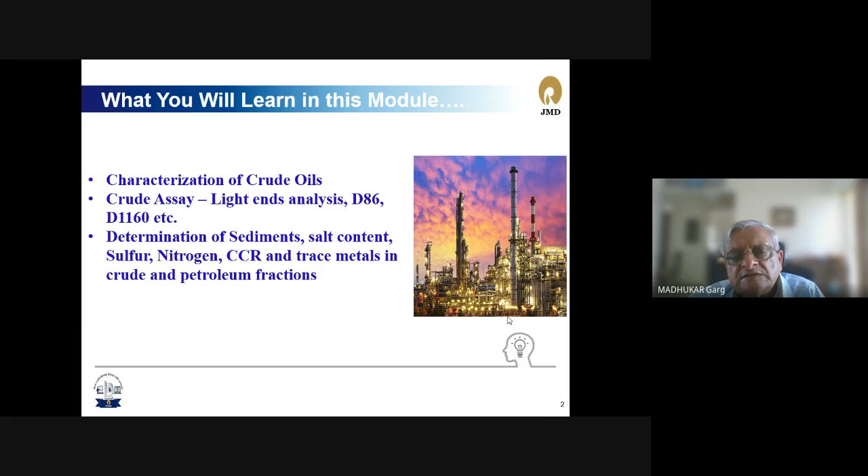Why is this important? It's because crude oil is a very complex mixture. There has not been a single individual, organization, laboratory, or even an analytical technique invented so far which can identify each and every molecule in a crude oil.

People have fantasized that crude oil would have something like 1,000 components or 2,000 components and stuff like that. But believe me, I've been in this industry for 46 years now, and I have never seen a full component-wise analysis of crude oil.

So what do we do? Since we don't have the capability to analyze crude oil in its complete detail, we need to develop methodologies and procedures to understand, characterize, and classify crude oils, so that if somebody talks about a particular crude oil, we know exactly what kind of crude oil it is, and whether we'll be able to process that crude oil in our refinery.

As you go along, on this graph the y-axis is the percentage, the x-axis is the boiling temperature in degrees Celsius. As you dig deep into the barrel of the crude oil, you will find that generally the normal and isoparaffins concentration goes down, and the naphthenes are very high to begin with, then they also go down.

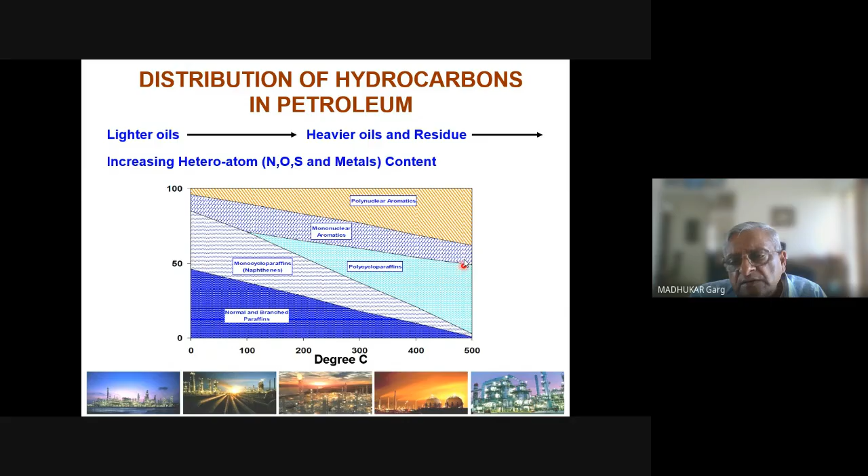The same thing is more easily seen from a chemistry point of view in this graph, where I have plotted carbon number on the y-axis versus boiling point. It's roughly matching with that table that I showed you earlier of various hydrocarbon fractions that you actually distill from crude oil.

So here they are shown like naphtha, and then kerosene range hydrocarbons, which we call middle distillates, which include kerosene or jet fuel and diesel as well. And you're going right up to something like 365 degrees Celsius here. On top is degrees Fahrenheit, the bottom numbers are in degrees Celsius.

Then you get into the vacuum distillation column where you actually distill these hydrocarbons under vacuum. So we call it light vacuum gas oil and heavy vacuum gas oil. These are changing in terms of the boiling point, and then of course something which cannot even boil under high vacuum.

We are talking about vacuum of the order of absolute pressure of 10 millimeter mercury, and that is about 545 degrees, 50 degrees centigrade.

If you look at the various hydrocarbons present in naphtha, you have basically paraffins. This is the normal paraffin graph: hexane, then decane, then C14 paraffin, etc.

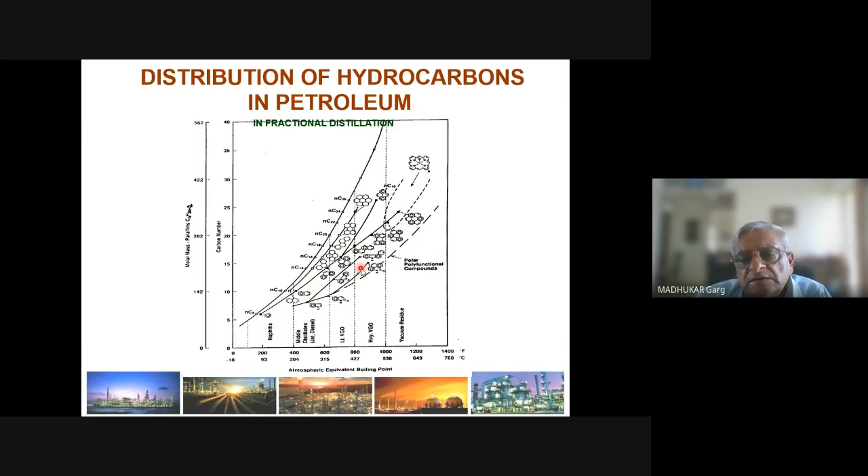But there is no way at all to identify each and every molecule in terms of percentage. So we have to understand and evolve a method of how you classify, given that you cannot determine these hydrocarbons analytically. So how do we represent the crude oil? This brings us to the discussion of crude oil classification.

Overall, there are four ways by which we understand crude oil in our industry. Essentially, the most important is where does it come from. So if somebody tells me this is a crude from Saudi Arabia, I know the typical value, the typical data on such crudes.

So the refiner has a very good idea whether it's coming from Dubai or wherever. Now there are two crudes used as a benchmark today: one is called Brent crude, and the other is WTI, West Texas Intermediate. WTI is used as a standard or benchmark in the US, while Brent is used as a standard or benchmark in Europe.

West Texas Intermediate is actually a kind of intermediate crude—I'll talk to you about what an intermediate crude is. But Brent is what is dug out from the North Sea, deep sea mining just north of Norway. It's somewhere between UK and Norway, that entire ocean area which is called North Sea.

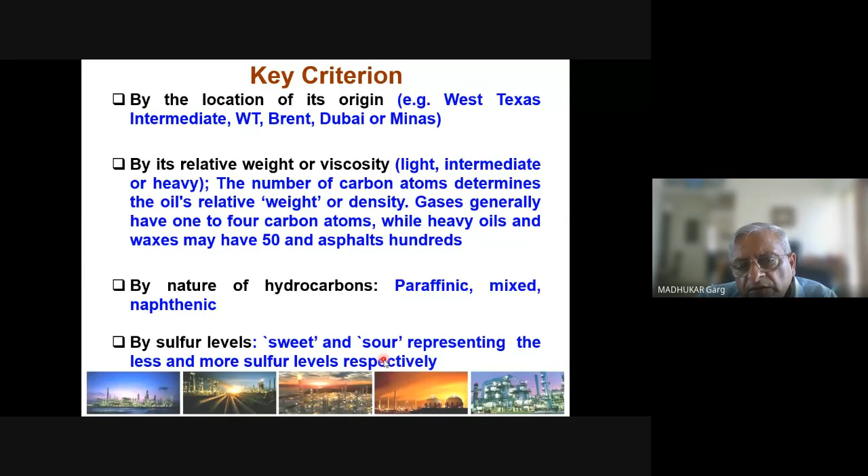Somehow these terms have gotten stuck in the industry. So crude oil could be, let's say, from Dubai, a Dubai blend. It could be naphthenic crude, intermediate crude, and sour, and you can have various combinations. So basically the source, whether it's light or heavy, what kind of hydrocarbons are predominantly present, and whether it has low sulfur level.

Now coming to the actual definition of the crude in terms of light or heaviness, it's common sense to link it up with the density of the crude. The density of the crude is used for weight to volume or vice versa calculations. So density is very important, and generally it's measured at 60 degrees Fahrenheit or 15.5 degrees Centigrade.

You'll find that this industry is extremely dominated by FPS units, by American units, because a large amount of development, technology, know-how and science originated here, and the US actually leads in this particular industry. You'll see other terminologies we use actually originated from the US. Density is also used to check the consistency of the crude supply.

So basically, if you are getting crude from the same source, let's say from Saudi Arabia, and it is termed as light Arabian crude, then when you measure the density of that crude oil, that itself will tell you whether it is the same crude oil that we received last time or if there is any variation. It is also a very important property used in a large number of correlations, and we'll talk about that in greater detail in the next class.

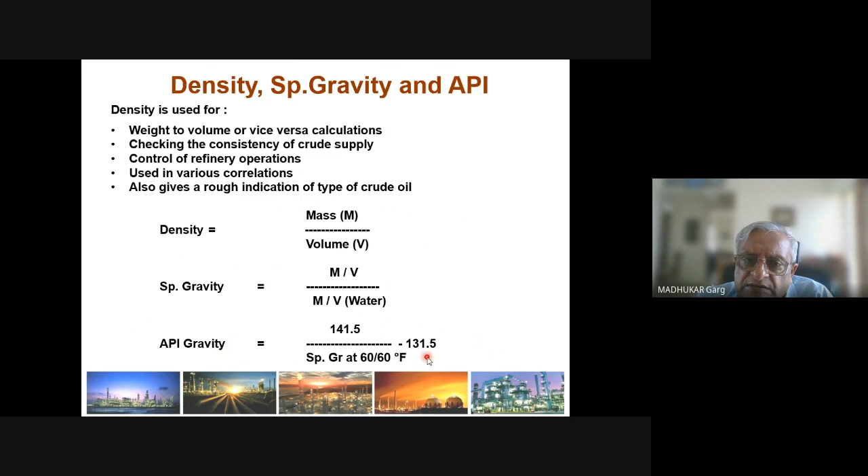Please remember this - API is a major factor for crude pricing. Even after two years in this industry, you become very conversant with it. The only way you can understand a crude oil is basically by somebody telling you what is its API gravity - it's called degree API, written the way you write degree Celsius with a small zero at the top. So the intermediate crudes, like WTI which I mentioned, that API would be somewhere between 20 and 30. This is a very important classification by which we try to understand crudes.

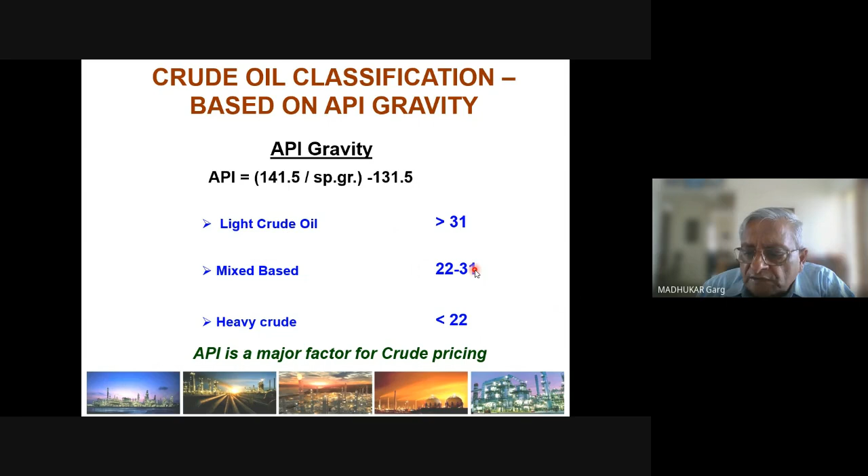It might look innocuous, might look very simple, and to some of you it might even look stupid, but API gravity is extremely important for us to know about any particular crude oil. And if you look at the sulfur part, whether it's sweet or sour, that again depends upon whether the crude is light, medium, or heavy. So for crudes in the range of 35 to 60 API, depending upon whether the crude is sweet or sour, the sulfur levels could vary between 0 to 0.5 or greater than 0.5.

So you can see one thing very clearly here: even the definition of sweet or sour crude really depends upon whether the crude is light or heavy. On the other end, if you look at the heavy sweet and sour crude, the API is low, but the sulfur levels go up, because heavier crudes by definition have a higher sulfur content.

You might find some heavier crudes have low sulfur, and one of our greatest examples is from our own country: the crude oil from Rajasthan, which is a relatively new discovery, about 20-25 years ago. It is in Barmer, and we have a completely new refinery set up there from Hindustan, a JV between HPCL and Mittal Group called HMEL, Hindustan Mittal Energy Limited. They set up that refinery to process the crude produced there in Rajasthan. That crude is heavy crude, but it is sweet crude, with low sulfur.

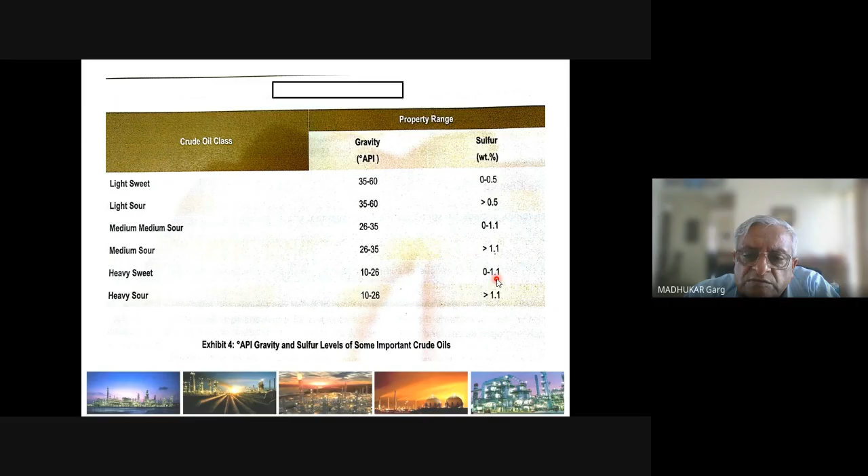So those are the exceptions, but generally heavier crude has higher sulfur. If it is less than 1% sulfur, it is called sweet crude, but heavy sour if above 1%. So the same definition of sour and sweet can vary depending upon whether the crude is light or heavy. For medium crudes, it's somewhere between 0.5 and 1.

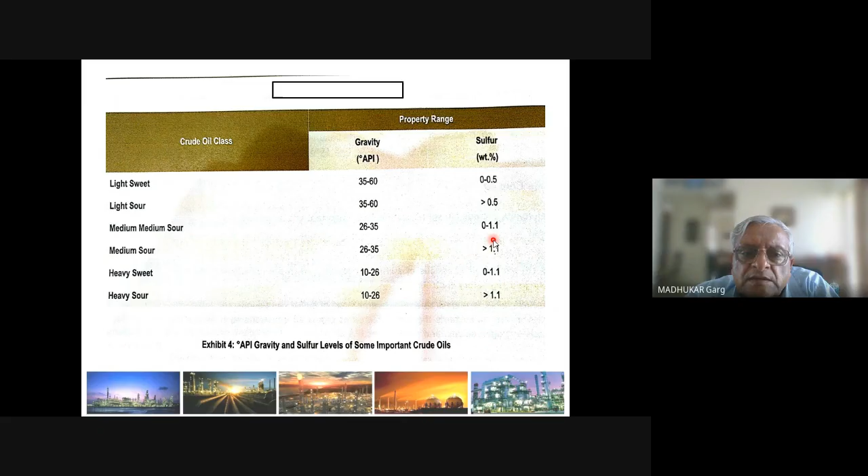So this is how you classify crudes. One is, of course, in terms of the location where it is coming from. Second, gravity, and third, whether it is sweet or sour. This gives you some idea about the various crudes. I have tried to include as many crudes as possible from our own country.

Like Narimanam crude, which is from down south, even south of Pondicherry, in a place called Kothalam. This is an intermediate crude with pretty high API, pretty light actually. Then Ankleshwar crude, which is South Gujarat, again high API.

This classification isn't in terms of gravity, but in terms of hydrocarbon type. So 'P' means paraffinic crude. There's another classification of crude which I'll talk about now, before coming back to this slide. The other type of classification is basically in terms of the type of hydrocarbons dominantly present. The crude could be either paraffinic, or naphthenic, or a mix of the two. We want to know what kind of hydrocarbons are dominantly present.

The reason is, for example, Assam crude has high wax content, so we put up that wax plant in Numaligarh refinery, and there was already a wax plant operating in Digboi. You can't put up the same unit when processing a Middle East crude, say coming from Saudi Arabia, Kuwait, Dubai or Oman, because those crudes do not have too much wax.

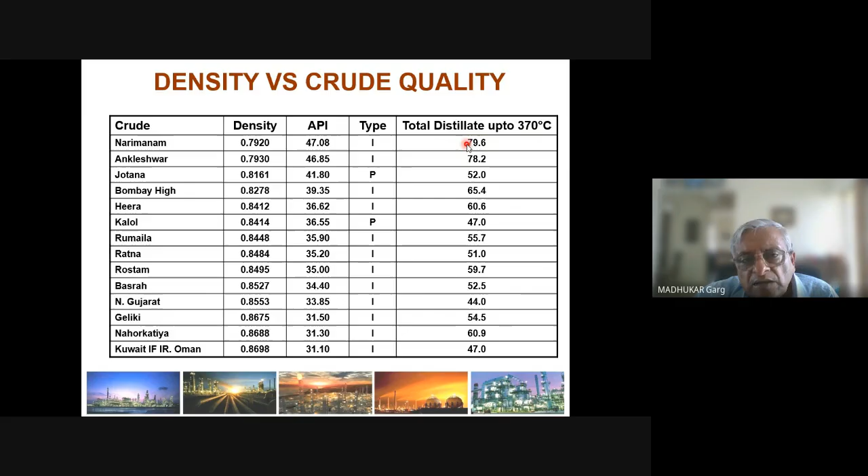And sometimes we also try to give this data as well, that is, suppose if I distill this crude at atmospheric pressure, how much quantity will distill up to 370. This data is very important, I'll tell you why. This crude, Narimanam crude, says that up to 370, 80% of that will get distilled. Now this crude is quite precious because I can make a large quantity of naphtha, kerosene, and diesel from here.

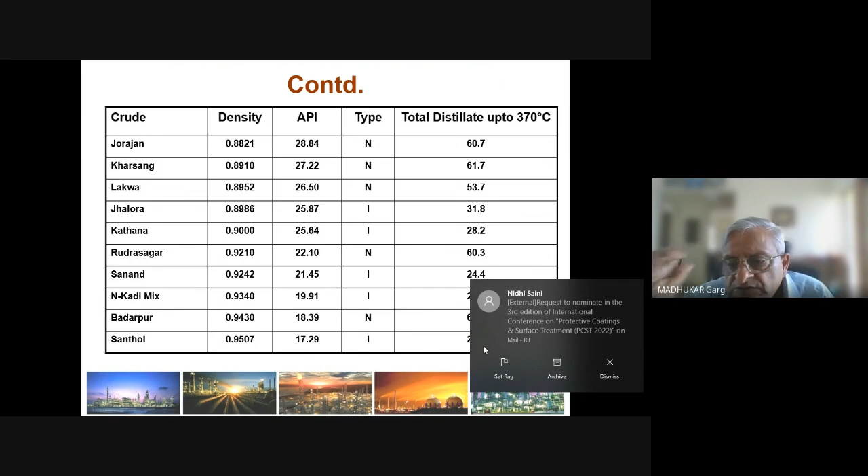So it really varies from 55 to 65. That is the typical most desirable range that we look at from the industry perspective. Anything lower, it is heavy. Anything higher, that means it's a light crude. And of course, a vacuum distillation. For example, let me tell you, this is a good time to tell you this.

If you look at Assam crude, almost 65% of the crude distills off at 370. So many refineries, when they came up in Assam, the Digboi refinery, the Guwahati refinery, did not have a vacuum distillation column, they just had an atmospheric distillation column. And even today, they continue to have an atmospheric distillation column. Over a period of time, the Digboi refinery has been modified, and now they have a vacuum tower. But Guwahati still doesn't have a vacuum tower, because they didn't see the need to put one, so whatever was coming out from the bottom of the atmospheric column, they put it into a process called delayed coking and made pet coke out of it.

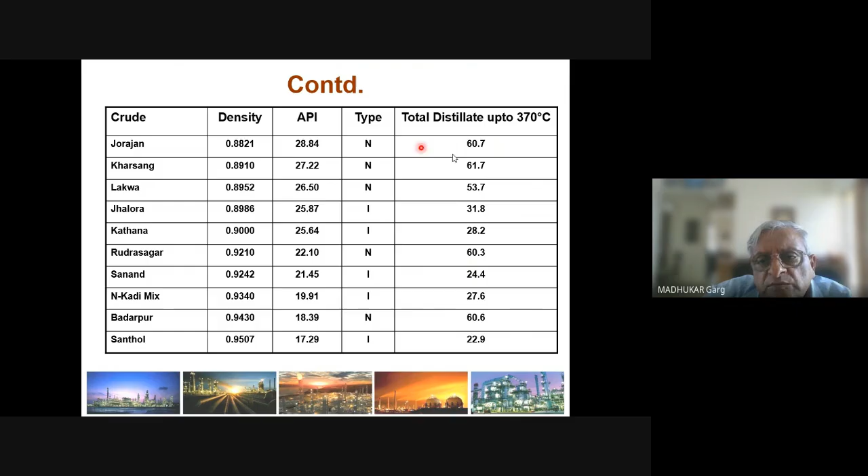So all this data is very important in terms of defining or designing a refinery configuration.

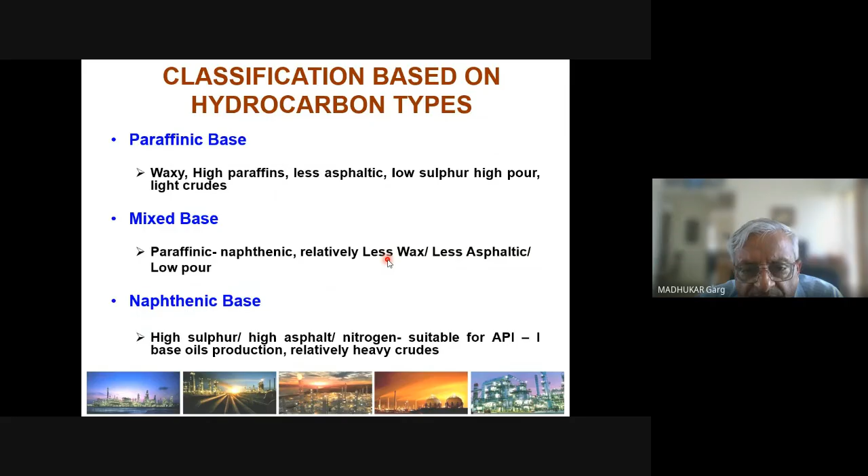The way we defined light or heavy crude in terms of numerical values, that means we gave a quantitative definition of a crude, whether when do we call it light, when do we call it heavy. Similarly, when you talk about paraffins, naphthenes, aromatics, or intermediate type of crudes, those are also relative terms. This example showed you it's all relative, so we need to come up with a quantitative definition of the crude oil in terms of paraffinicity, naphthenicity, or aromaticity.

One way is this UOP, which we call UOPK or Watson K. K is just the letter K in the English alphabet. It is defined as the cube root of the boiling point in degrees Rankine upon specific gravity.

So suppose the fraction has a boiling point of, let's say, 100 degrees Celsius. 100 degrees Celsius means 212 degrees Fahrenheit, and 212 plus 460 gives the degree Rankine. Don't ask me why we look at degree Rankine and not degree Kelvin and so on. As I told you, this whole science got developed in the US, and they use their own units, and because of that the industry is stuck using these units.

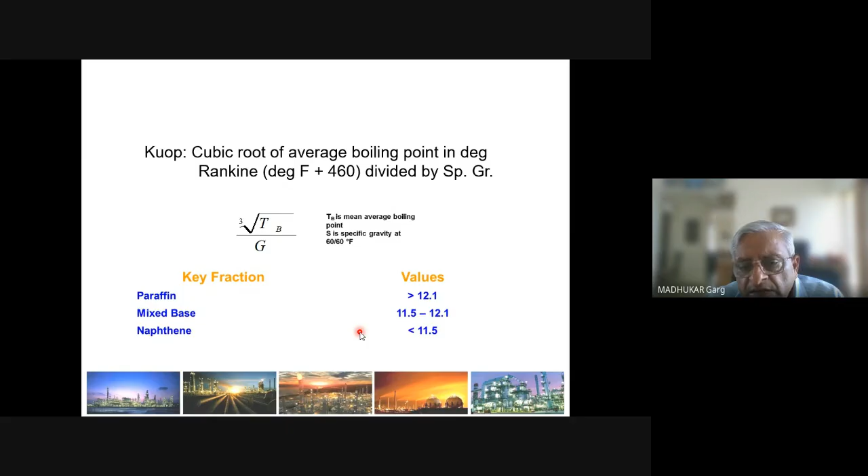If suppose there is a petroleum fraction boiling in the range of 100 to 200 degrees Celsius, do we take 150, that is 200 plus 100 upon 2, or do we take something else? That is something I will define for you, what do we mean when we say average boiling point. So for now, just remember that you have to use an average boiling point in degree Rankine, cube root of that upon density, and that decides the paraffinicity or naphthenicity of that crude oil.

There's another parameter called BMCI, the Bureau of Mines Correlation Index, given by this formula, which is 48640 divided by average boiling point in degrees Kelvin. Mercifully this is in degrees Kelvin because this particular index came much later.

This particular parameter is more used for feedstocks which are used to make carbon black, and carbon black is used in making tires in the tire industry. As you know, all our tires are black, and that blackness is because of the carbon black added during the mastication process of rubber. Rubber by itself is white in color, whether natural rubber or synthetic rubber, it is white in color. So we add carbon black, appreciable quantities of it, in the rubber, and that makes the rubber black.

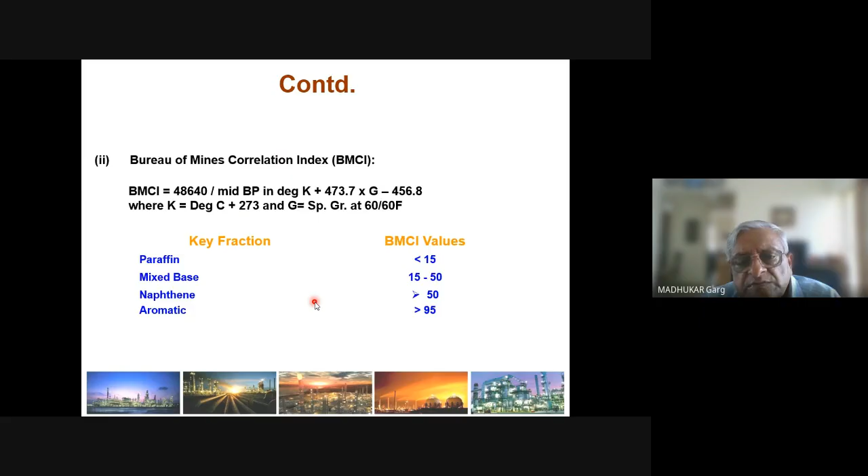This carbon black again also comes from the refining industry, where you use a certain petroleum fraction, and the quality of that petroleum fraction should have a good amount of aromatics in it to make good amount of carbon black. That is why BMCI is a parameter used to understand the quality of the feed for carbon black, as a carbon black feedstock, called CBFS, carbon black feedstock.

So actually, if you look at how do we understand crude, it is understood by something like crude assay. For example, each of us individuals have what we call a birth chart or Janam Patri, and you need three data points to develop a complete birth chart: your place of birth, the date of birth, and the time of birth. So basically these three variables more or less define the position of stars or whatever.

And it tells you many more data depending upon how good the person interprets that. So similarly, in crude oil, there are three basic properties which we definitely would like to know. First is API, of course, and the second is the UOPK. And then beyond that, we like to know the distillation characteristics of that, and I'll get to that in a moment. So, how does it distill? In what range does it distill? So these three, UOPK, API, and distillation characteristics,

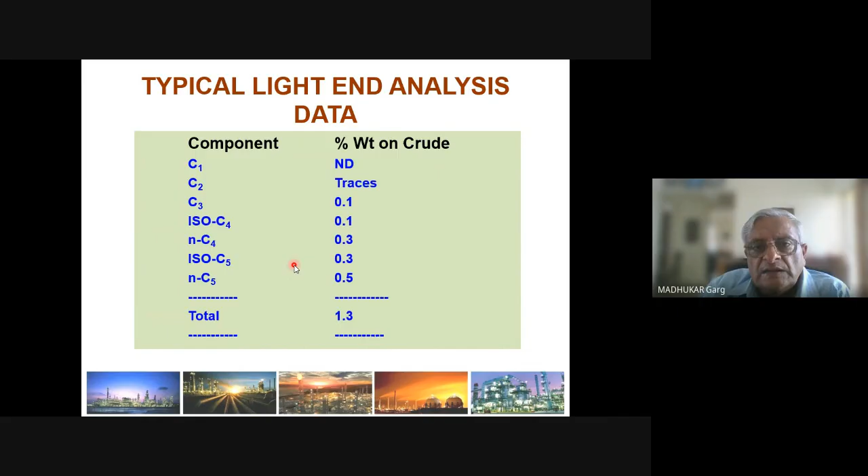India still imports LPG, by the way, and this is the only petroleum product that we still import. It is very important to know the LPG potential of crude oil, and that is defined in terms of light end analysis. So you have propane, butane, and various isomers of that, indicated by RVP.

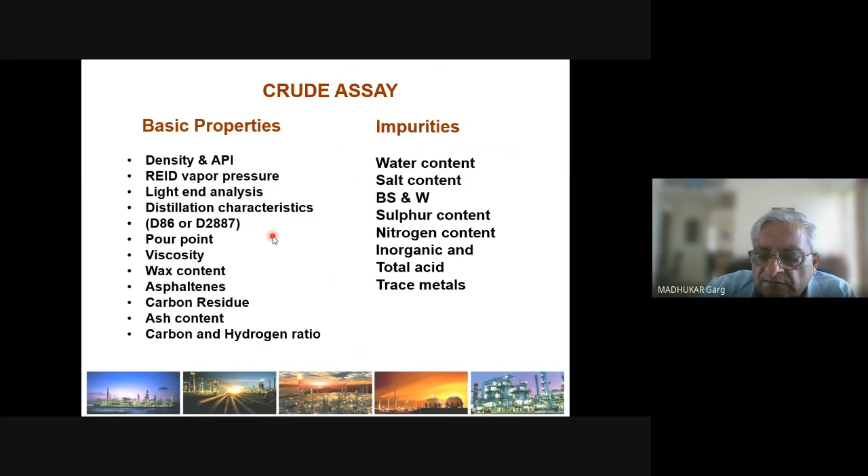So if you go back to this crude assay table, we have already defined API, and now I have told you about Reid vapor pressure and light end analysis. What comes next is the distillation curve, or the distillation data of the crude oil.

I think I will discuss this and stop, because there's too much information that you need to digest. So for a crude oil or any petroleum fraction derived from crude oil, whose composition we don't even know, the boiling point is typically represented by a curve.

The curve has percentage volume on the x-axis and temperature on the y-axis. It tells you from what temperature to what temperature this material is boiling. There are several laboratory equipments designed to generate this data, not only for crude oil but also for petroleum fractions.

This is not specific to crude oil; it is right across the refining industry, used for various process units for everything. We like to know what the boiling range is, that is the boiling curve. So this is what is called a distillation curve.

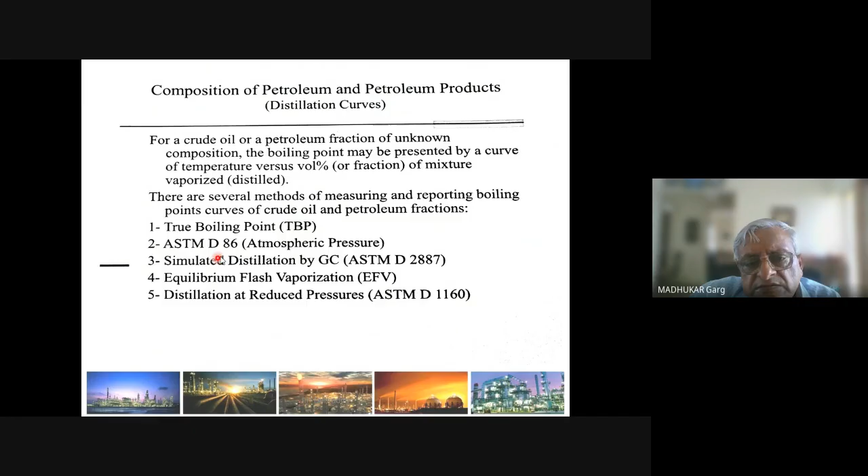Now if you look at laboratory distillations, you have three types of distillation that you would have seen. You have TBP, and then there are two which are actually analogous to each other, ASTM D86 and D1160.

The only difference is that D86 is done at atmospheric pressure, while D1160 is done under vacuum. And the vacuum that you use is 10 millimeter Hg absolute pressure, so 750 millimeter vacuum. And then the other one is actually using GC.

So there are three classifications, generally, of lab distillation. One is called fractionating, the other is semi-fractionating or non-fractionating, and the third is simulated. The fractionating is the TBP, the true boiling point, and I'll tell you how we do that. The semi-fractionating or non-fractionating is D86 or D1160, while the GC is actually the simulated.

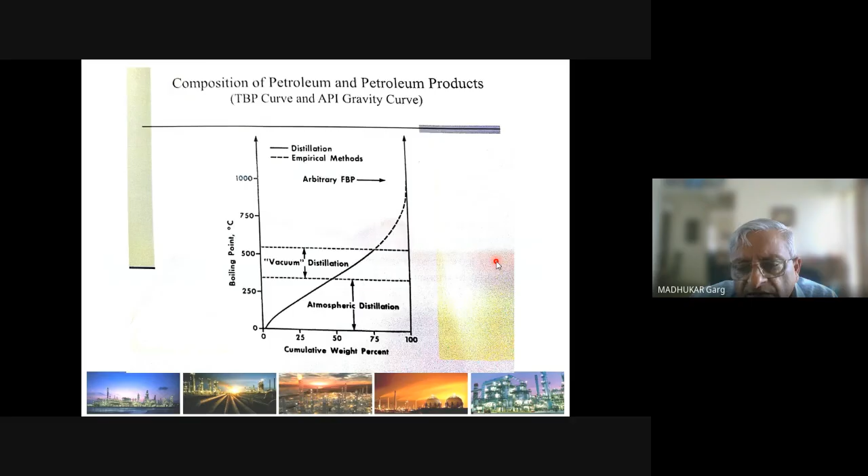That is why we call the GC simulated distillation, because we are simulating the distillation curve using GC. Those of you familiar with gas chromatography would know quickly that it works on the principle of molecular size, and the heavier the molecule, the bigger its size.

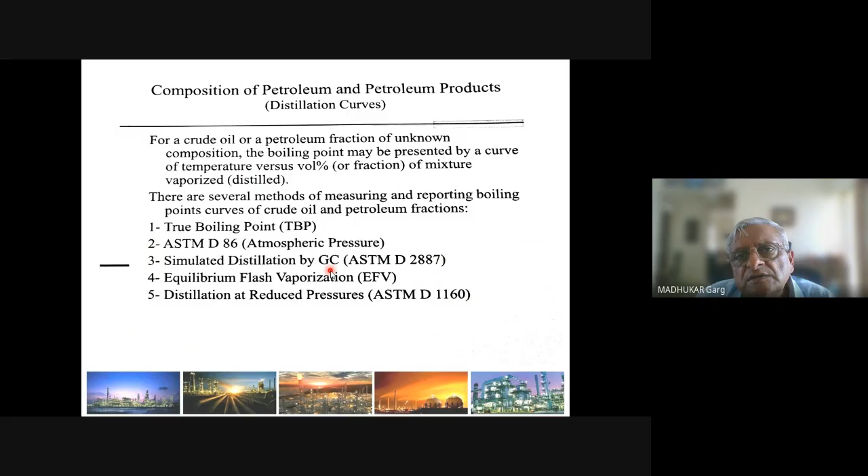That is why we are able to separate out the various fractions by GC, because as you pass the sample through the column in the gas chromatograph, the lighter molecules come out earlier, and then slowly the heavier and heavier molecules come out. So this more or less represents the distillation of the sample, and that is why it is called simulated distillation. I'll stop after this slide, and then we'll wait for some questions.

So if you're looking at fractionating distillation, we are talking about TBP, true boiling point. How you do it is standardized and covered in a method called ASTM D2892. Essentially it's a batch distillation, and we don't go beyond 360. Forget about 400, we don't go beyond 360.

We have a round bottom flask at the bottom, and then you put a long column having 15 trays on top of it with pretty heavy reflux. Whatever goes up beyond that gets collected in a vessel, and we measure that in terms of temperature with respect to volume. This is how we determine TBP distillation.

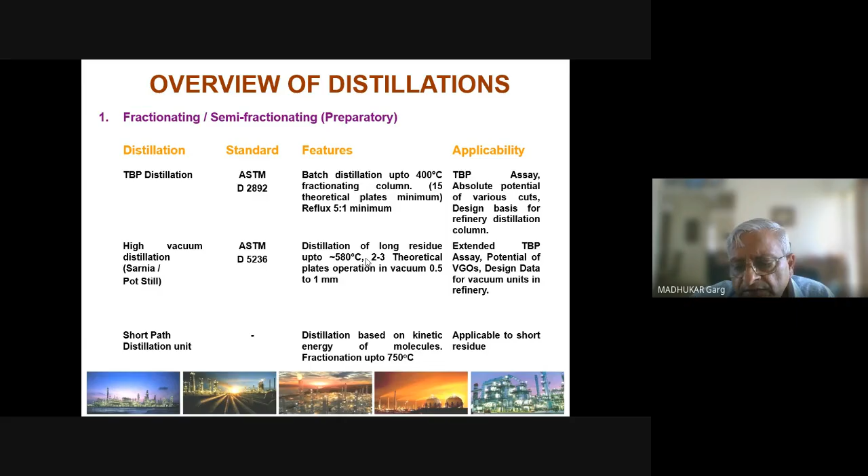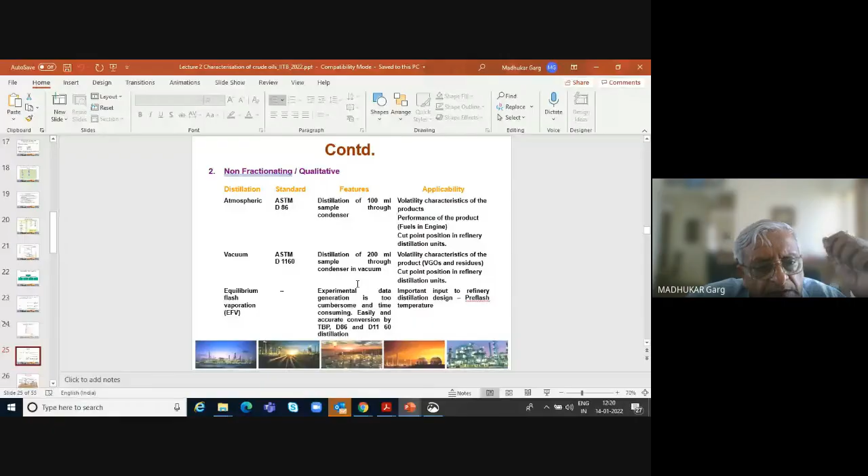Like in your McCabe-Thiele diagram, remember the way fractionating columns operate. There is a kind of heat transfer and mass transfer between the most volatile component and the least volatile component. As the hydrocarbons go across every tray, the less volatile component condenses, and in that process it vaporizes the more volatile components from the liquid going down. That's why you get good fractionation between the different volatilities, and that's why it is used in TBP.

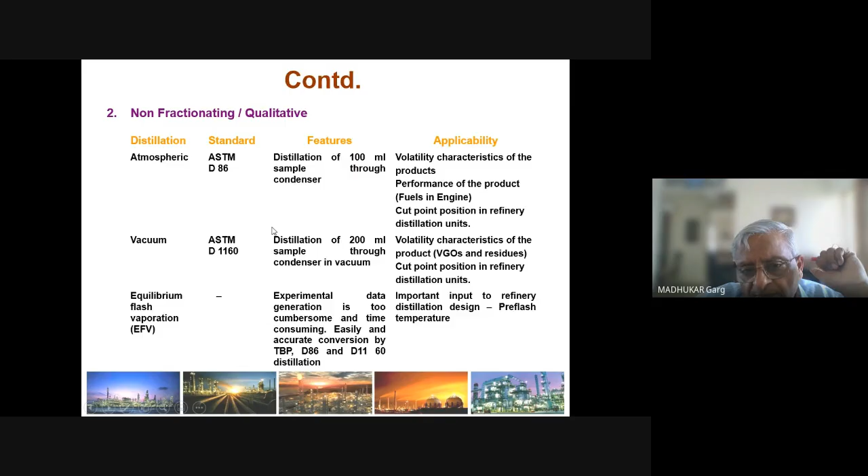Unlike that, in D86, we don't have any of it. We just have a pot, as you can see, a distillation flask. So this is just a distillation flask which is heated, and you put 100 or 500 or 200 ml of the sample here, and then you start heating it. When the vapor comes out, the moment you see the first temperature, that means the first vapor has come out. So you note that as the IBP.

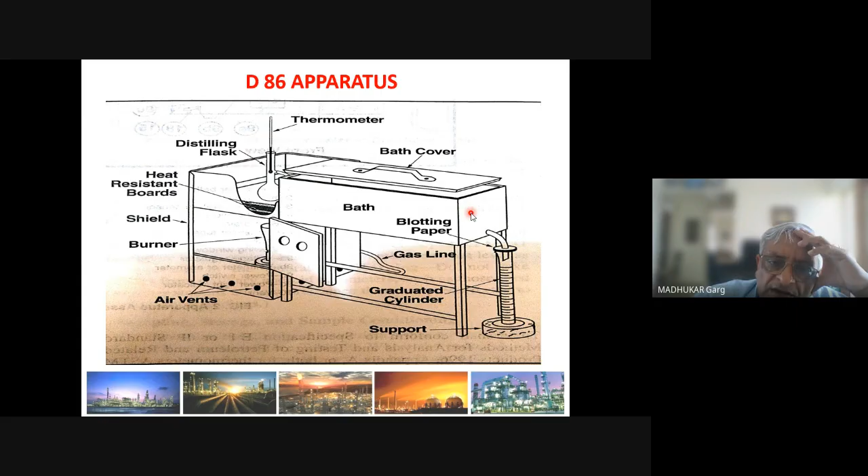This is actually a cooling water bath through which this pipe runs. You can see this small pipe, which is the vapor coming out. So it goes through this bath - this is the very rough, old primitive way of doing D86. Now the whole thing is completely automated. You just take a sample, put it in the instrument, switch on the button, and it gives you the graph on the computer straight away.

So this is how the liquid condenses and gets collected in this measuring cylinder, and you can then see temperature versus percentage volume, until the whole thing gets vaporized. The moment you see the temperature, the first droplet will drop, and that is the IBP, then 5%, 10%, 20%, 30%, 40%, like that. So this is ASTM D86.

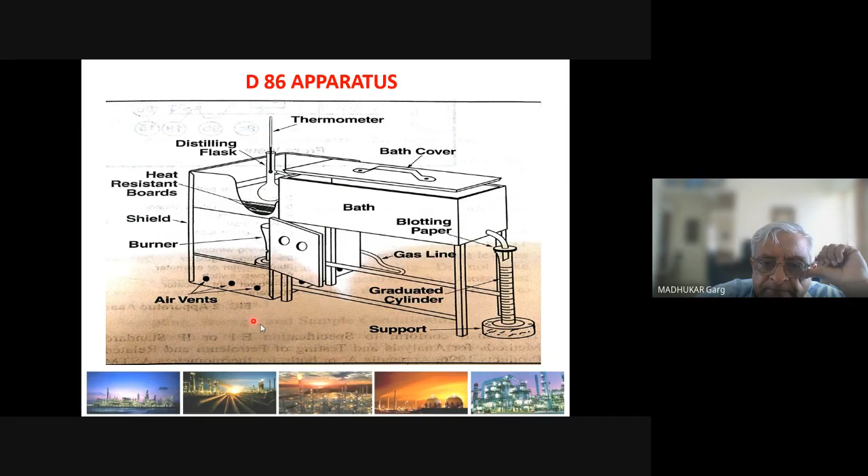This picture I pulled out from some old literature to show you, so that you get a feeling as to what exactly it is. The current instrumentation, what you buy from instrument suppliers, you can't see none of this - it just comes in a box. You just put the sample, switch on the electricity, stabilize the whole thing, and it gives you the data in half an hour. So this is ASTM D86.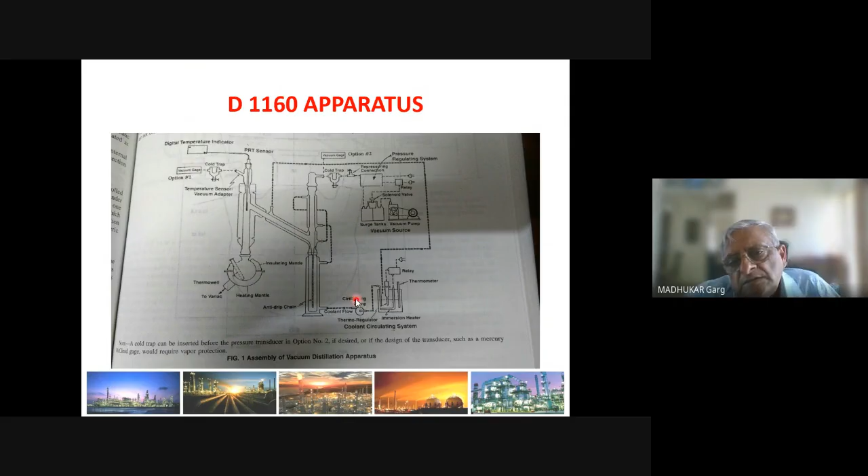It comes down, and you can measure with respect to the percentage volume. This is all completely encased, so that you don't have air leakages, etc., but this is transparent, so you can see. You need, of course, a pump to pump out the material out, otherwise it will not come from vacuum to atmospheric pressure. So this is what it...